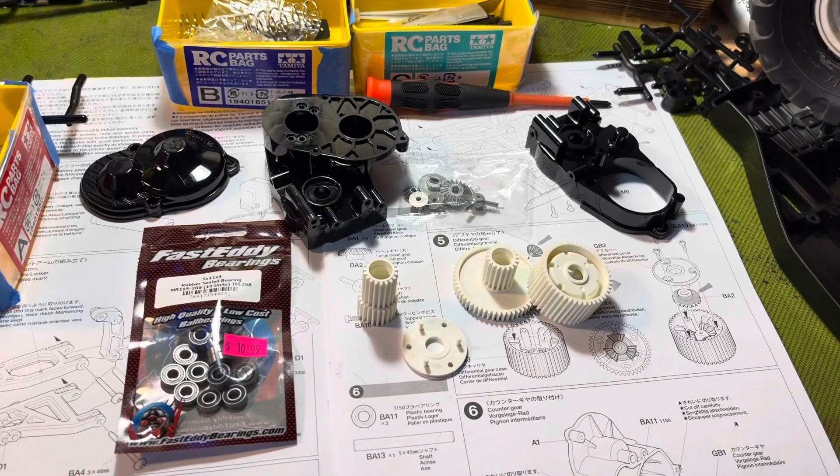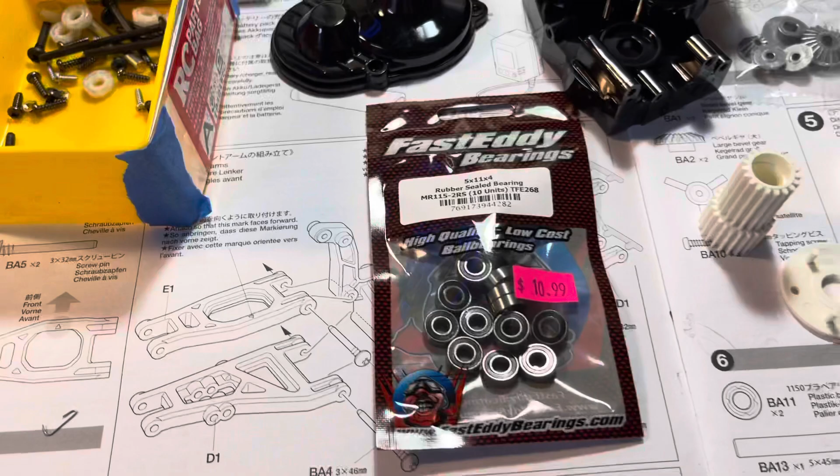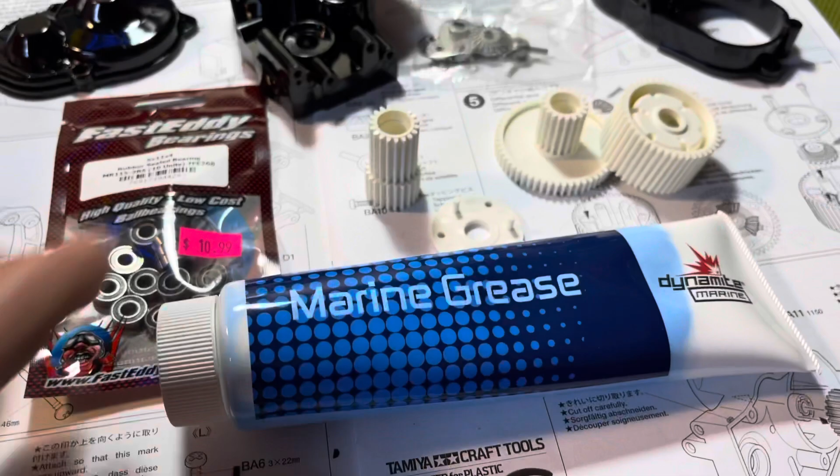All right, guys, we are back with the Holiday Buggy build. And I know I said in the last video I was not going to put bearings in this thing. I was just going to use the supplied bushings because I feel that in a stock build, there's nothing wrong with those. But I was at the hobby shop today to actually get some good marine grease to put in some of these cars.

And the FastEddy bearings were actually on sale, and so he put 2 packages into one and sold it for $10.99. You can't beat that, and I'll have a few extra bearings laying around to boot.

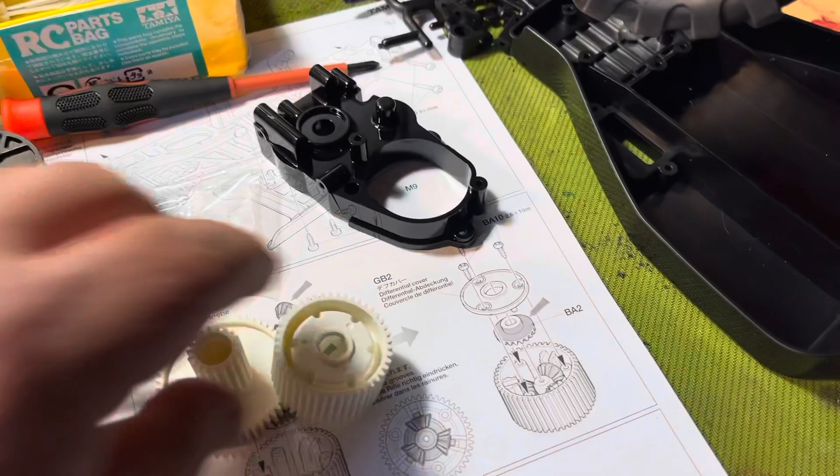So anyway, we are going to start by building the gearbox, and so we're gonna have to take the ring gear here and build the spiders, put that all in there, grease everything all up, and screw it all together, and then start putting everything in the case, get the bearings in there and whatever else. So that's what we're doing. I will bring you back shortly.

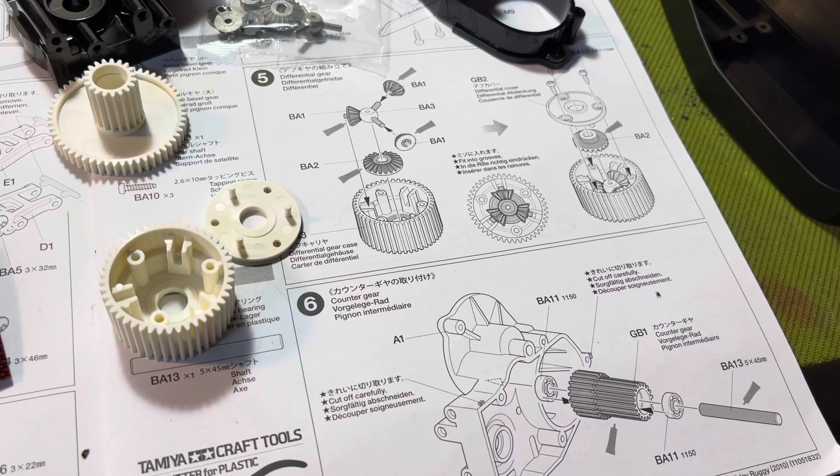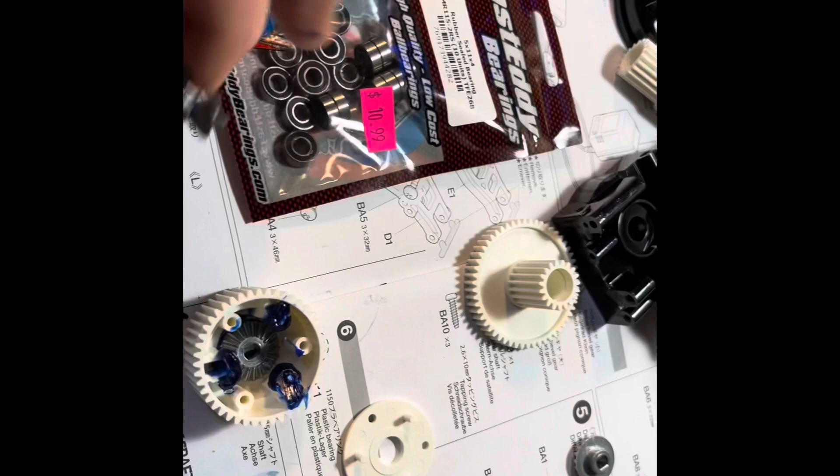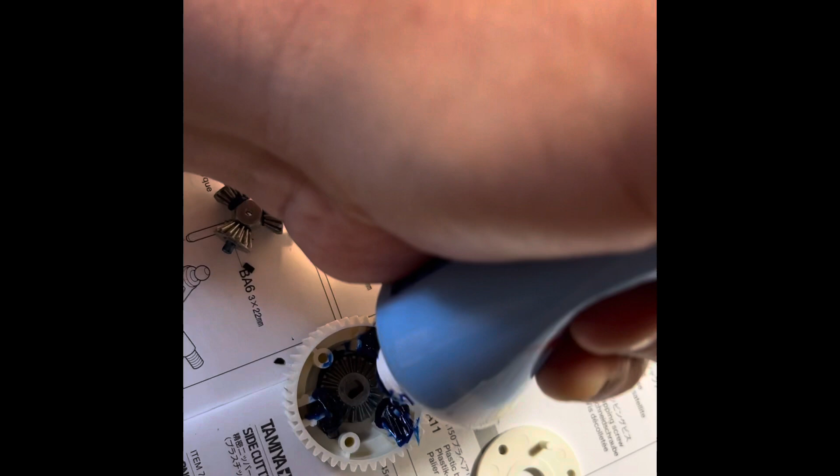All right, so we got our ring gear and we've got the one bevel gear in there. Got my spider assembly here, and I'm just gonna throw a little bit of this Horizon Hobby marine grease down inside of here, a little bit more. Stuff's stupid thick, but it works really well. Hard to do this on camera. I'm gonna bring you back.

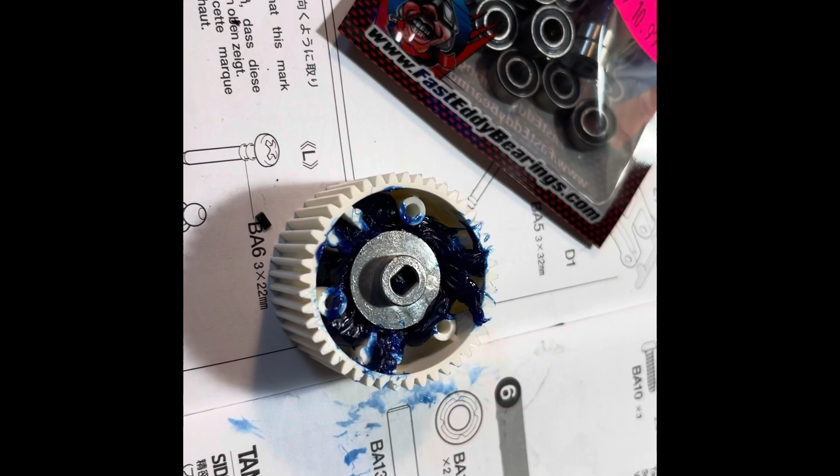All right, we've got grease all packed in there. Got the 2 bevel gears up against the spiders, and I will install the outer piece there.

And again, like I said, I told you I wasn't going to use bearings, but he sold me 2 packages for $10.99, so you can't beat that. And then we won't have to worry about it if we do upgrade the motor. So, all right, that stuff is done. Now we will move on to putting the bearings into this casing right here, and start getting the gears and the shaft in there.

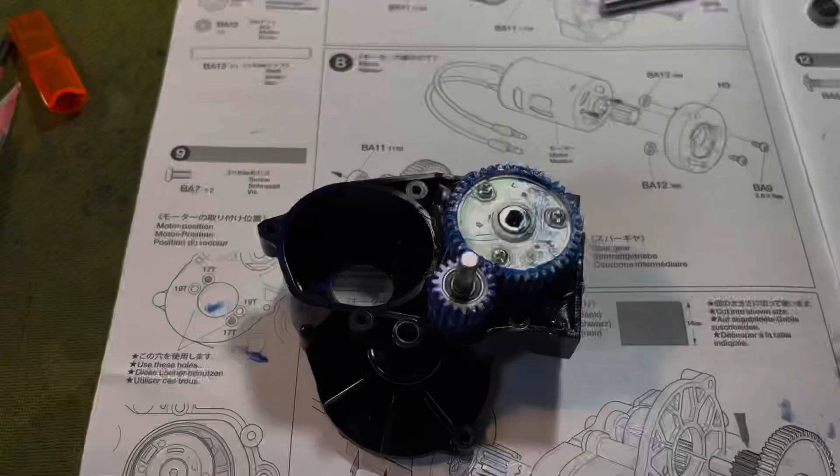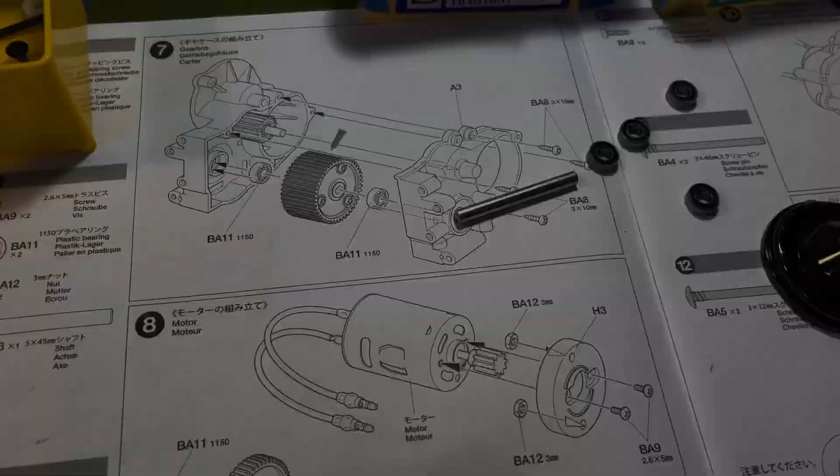All right, these 2 gears are in the case. Next step will be putting the other case half on and screwing it in. All right, step 5, 6, and 7 are done. And if you give a listen, you can hear all that grease in there. I probably over-greased it. But, you know, it happens. I've still got to tighten my screws a little bit, looks like, but rather have too much grease in there than not enough.

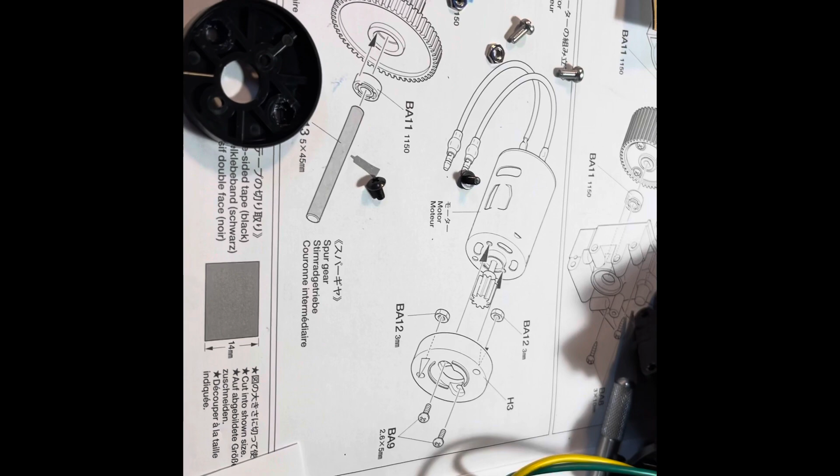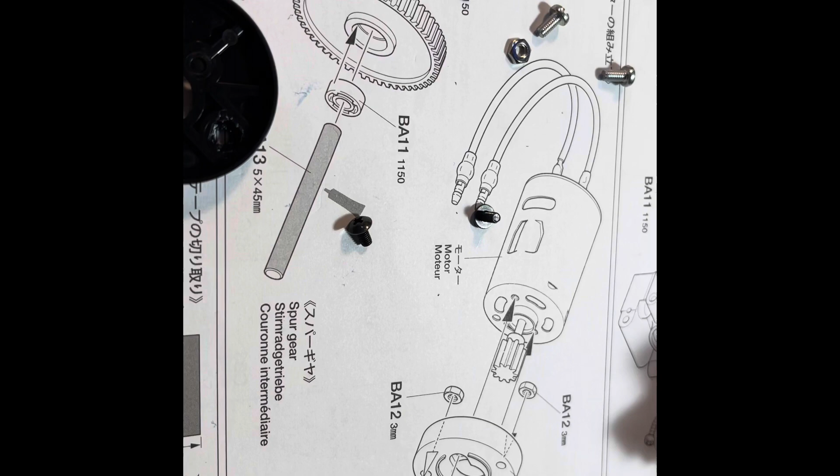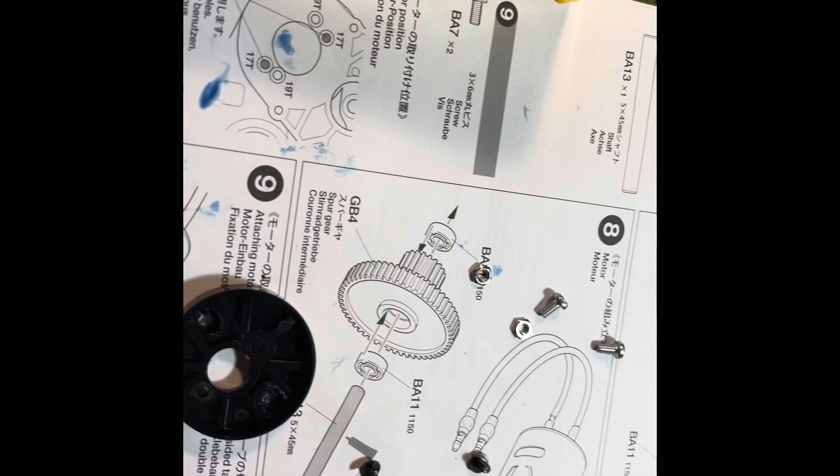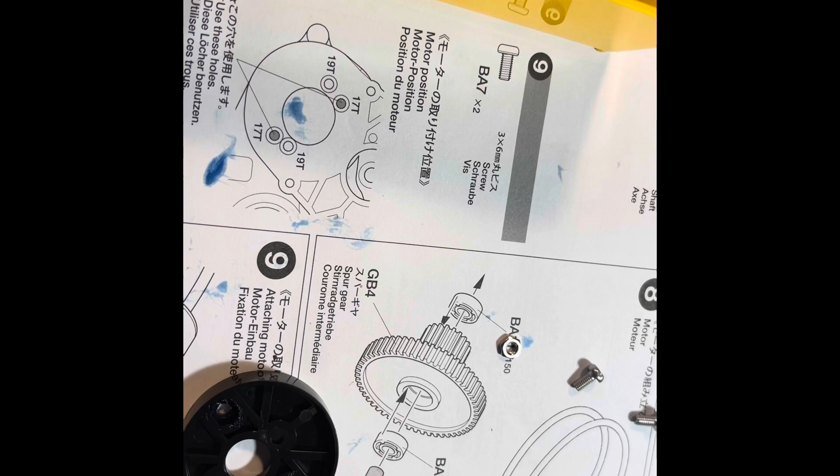All right, so this next step, we have to put the motor mount onto the motor, and then we will attach it to the gearbox. But before we can actually screw the motor mount to the motor, we have to put the nuts in there for retaining the motor mount to the gear case. So, a little tip here, what I've done is put a little dab of grease down inside of these, and that will hold the nut in place when you get it stuck in there, and then it's not going to move.

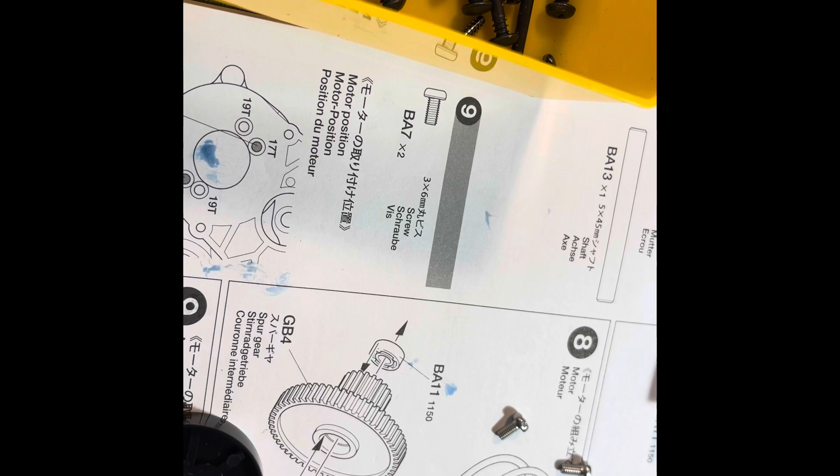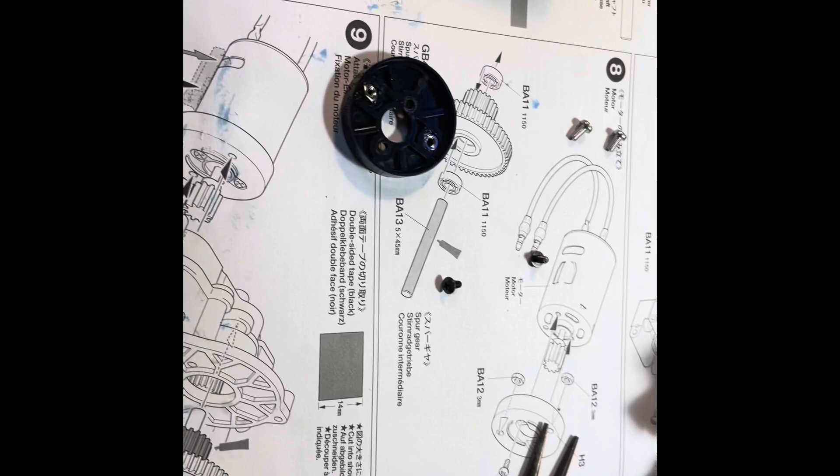So, hard to get that in there. Got it a little bit off. And did it for a second time. But anyway, that grease, as you can see, holds those in there. So I'll get that straightened out, and I'm going to screw it to the motor, and I'll bring you back.

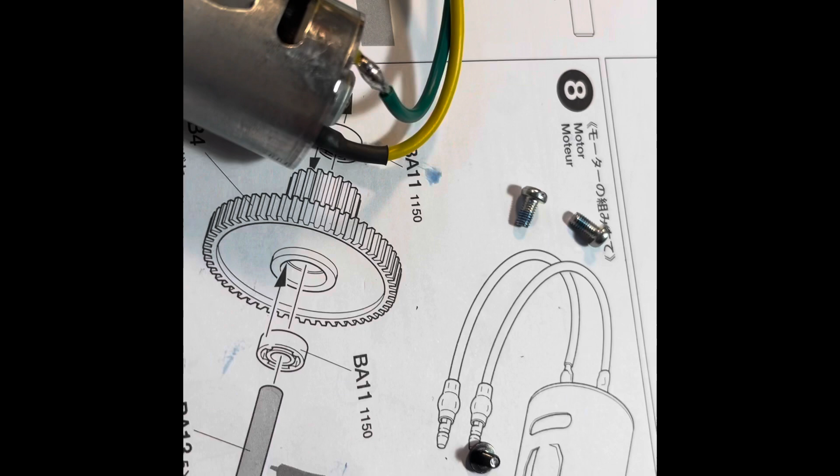I also wanted to include that since we don't want these to back out, I did put a little drop of blue Loctite on those two screws, which are the silver ones that hold the gear case to the motor mount. And then I'm going to do the same thing here on these two screws, which are the ones that hold it into the motor. Just a tiny little bit, and I'm just putting it on the end of my knife and wicking it onto the threads.

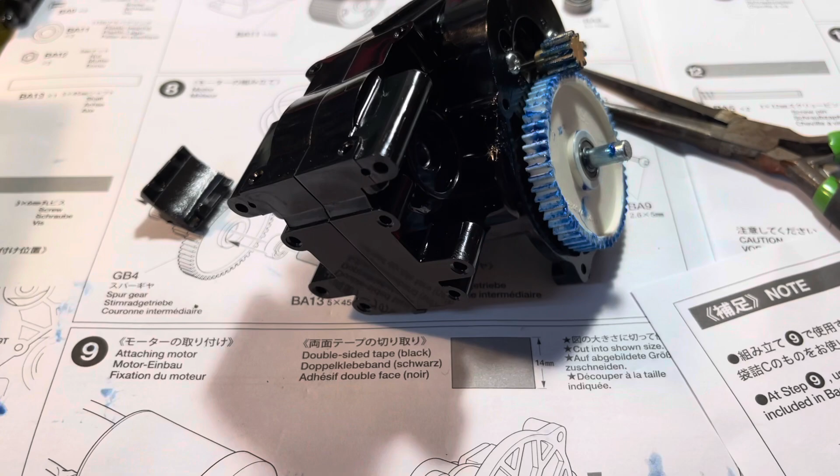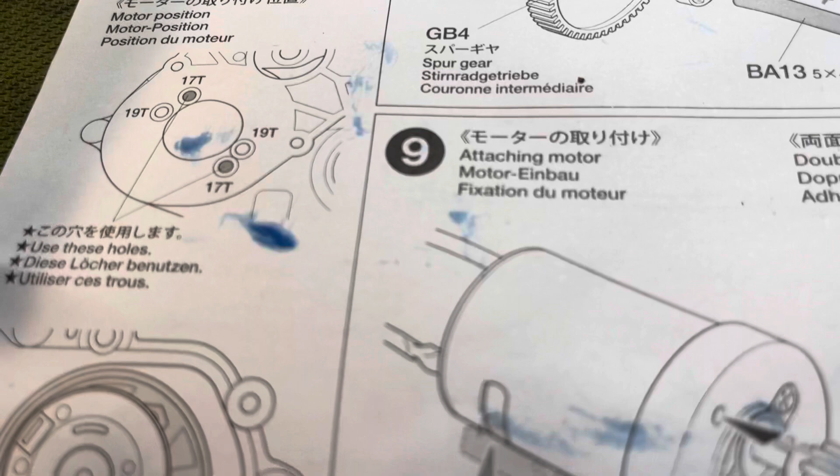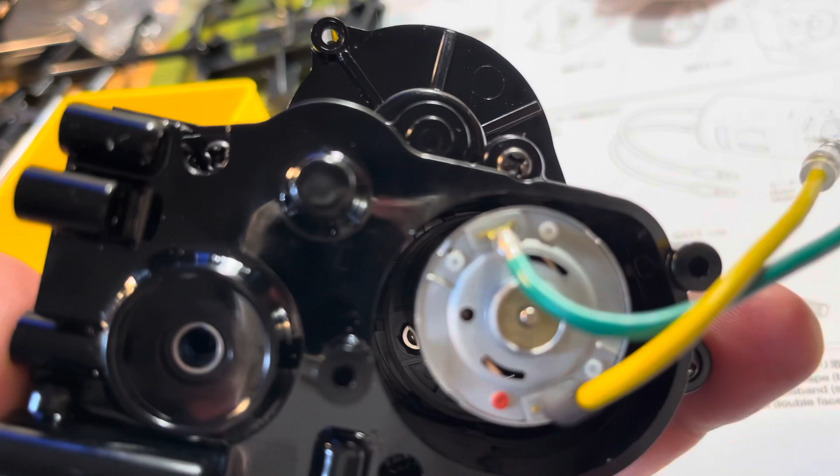All right, so we've got the motor in, but I just noticed that I forgot a step, because you got to put this little piece on the bottom side of the motor like so, using the double face tape, and then put it in the hole. So I've got to pull the stinking thing back out. Live and learn, right? I had the piece sitting right there. I already peeled the double face tape and everything. I just didn't even think about it and got ahead of myself.

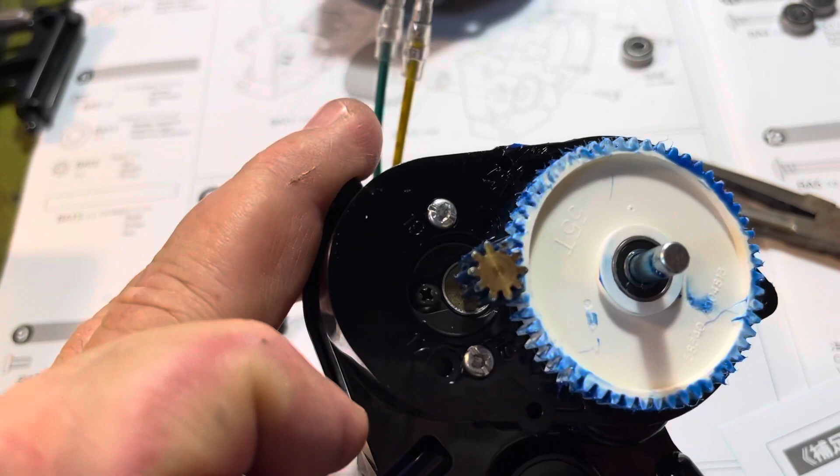So then the last thing to do will be put this gear case cover over. It will go over here. As you can see, I've got well greased pinion and spur gear, and so that's going to be the last step after I take this motor back out and remount it, because I forgot a step. All right, and there we go. One completed gearbox all together.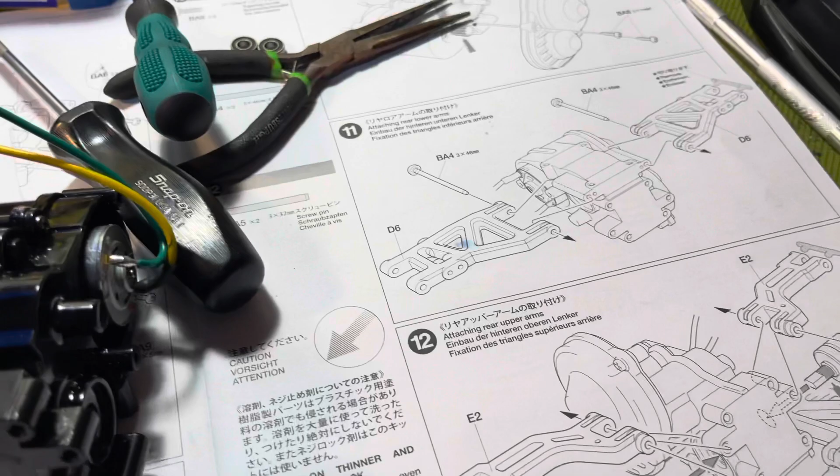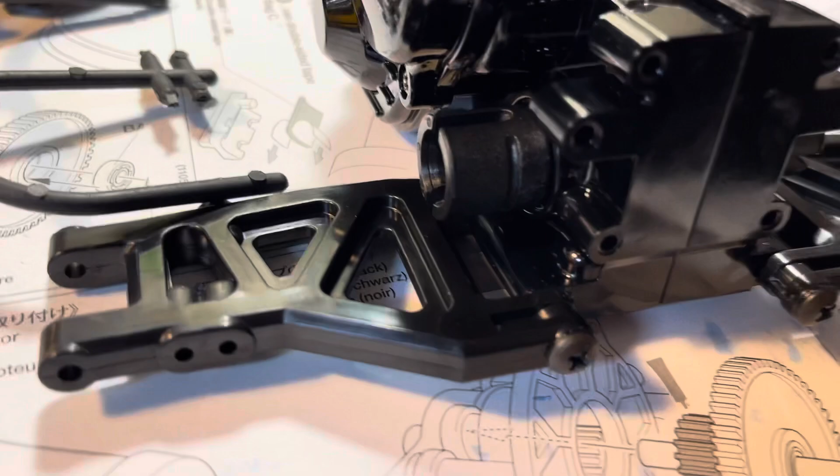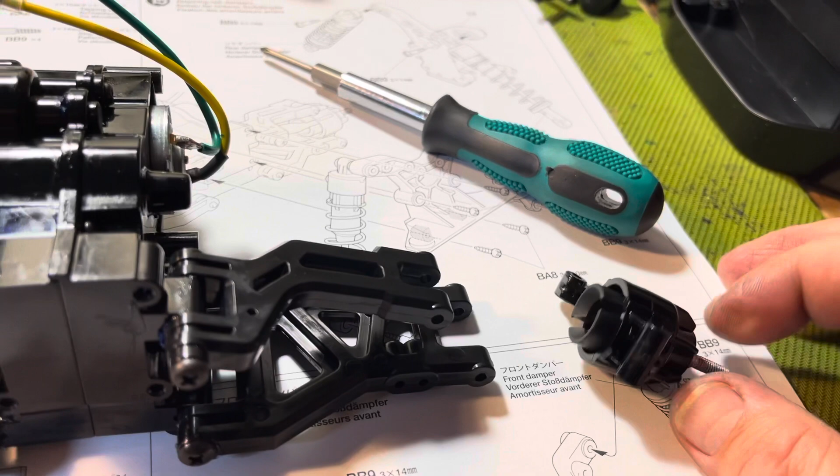Next we'll be mounting the A-arms. Getting closer. Lower arms on and inner drive cups in. So next will be the upper arms and the drive shaft and the knuckles. Bearings are in the knuckles. Drive cups are in those bearings, and man, do these things spin nice. I'm glad I went ahead and did this. And so now I'll get the drive shafts and get everything mounted here and bring you back.

All right, gearbox and rear suspension complete, save for shocks, and that'll be in the next video.